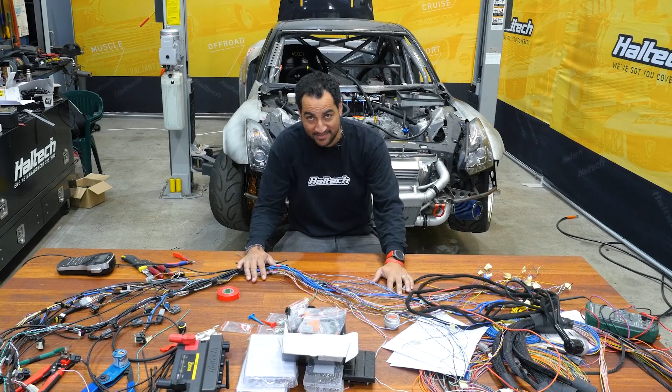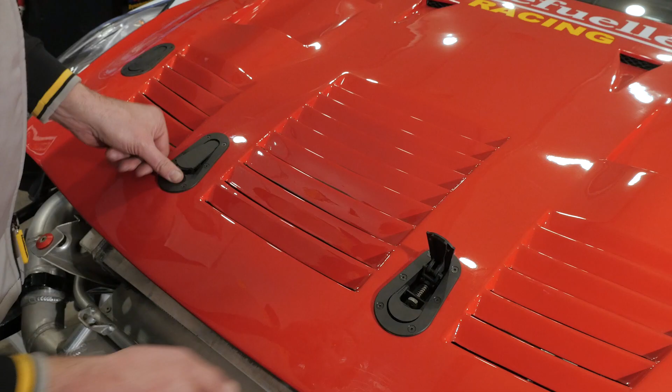So for a quick refresher of what we're dealing with here today, this thing is a Nissan R35 GTR, but does have some differences. Looks pretty similar in here, the Nissan VR38 engine, but as we outlined in the other video series, Brian, the guy that owns this car, has also got an R35 track car in factory form. That's the one with the transaxle, the GR6 gearbox all at the back, the flappy paddles, all that stuff. He wanted this track car to be a little bit different, so he went for a sequential, manually shifted gearbox up the top. It's got an R33 Skyline style rear end, so it's got a conventional differential in the back. He's kind of brought it back to a traditional style race car.

When Davo and I originally did the wire up and the tuning on this car, it was the first time the engine had been fired up after having all this fabrication work done. So we got it on the dyno, we ran it up, and we put a list of things together that needed to be touched up before the thing could go and compete competitively. One of those things was the wastegate springs. This thing has got a factory engine and it's got upgraded turbochargers.

There's a reason for that. Brian's using this engine as the mock-up to get the whole car dialed in, get the tune-up on song, get the suspension sorted, get the flat shift throttle blipping of the sequential gearbox sorted. Then, when that's all under control, he'll drop in his big banger engine. But the factory form VR38 is nothing to laugh at - this thing is making very, very healthy power.

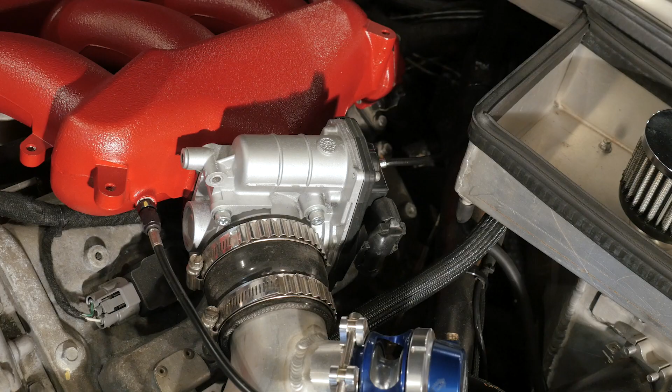So the way I actually managed to bring the power down in the car was by controlling the dual electronic throttle body so that when Brian hit the throttle flat to the floor, those throttle blades were only opening to about 35%. Not an ideal way of doing it, but it's all the tools we had left in the toolbox. It needed to get to the racetrack, and that's the way we got it done.

Since then, it's been back to the workshop. They've fitted some 12-pound wastegate springs in it. So now we can go back through and we can set up some boost by gear and some mapped out boost levels. The way we're going to do that is on our keypad inside the car. We've got a keypad in there that works like a rotary trim. We press that button, boost goes up and up and up until we have a whole bunch of fun.

But before we get into all of that stuff, let's go inside. This thing's had a lot of work done since you would have seen it last, so come in, have a look around. It has been finished off really, really well. This is one of my absolute favorite circuit cars.

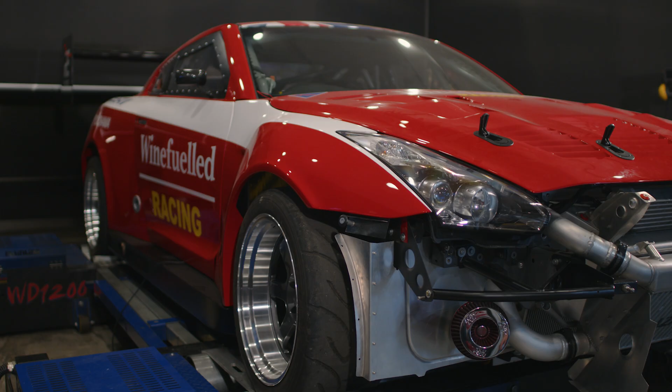Well, inside is just as impressive as the exterior of this car. When you're sitting in the pilot seat, we've got the beautiful Haltech IC7 dash right in front of us, and we've got our reverse camera just to the left here.

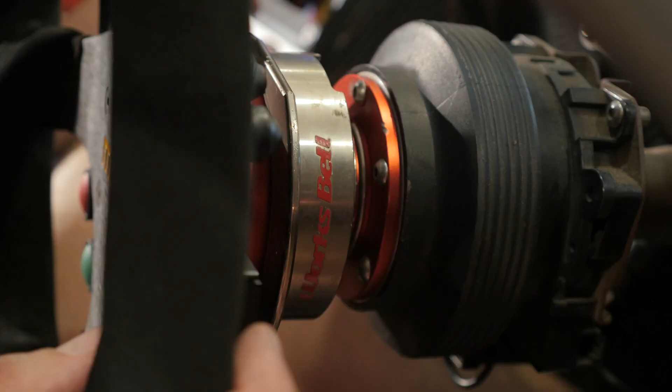We've got the 15-button keypad that's controlling all of the stuff that we need to do while we're driving. It's also got this beautiful steering wheel with buttons on it, with a little transmitter off the bottom here, across to a Bluetooth module, then into the engine management system. It's got the Hollinger flat shift load cell gear knob up the top here.

It's got the Albins sequential gearbox down the bottom. But what's crazy in this car, what's so impressive, is the carbon absolutely everywhere - the carbon dash, carbon center console, carbon doors, the roof's carbon. This is a beautiful race car and it's so well prepared.

So this was the guys at Peruzic Engineering who are responsible for finishing off this car and making it as nice as it is. The guys actually made the pedal box in it themselves. Fantastic engineering job, this car.

When you see it in person, you realize that the roll cage, the seats, every single part in it is really well thought out so that it's easy to work on. And like all of these things, the more work that's been put into it, the simpler it looks. That's the case in this car - you get in and think, oh yeah, it's functional, that makes sense. It's just simple and it just works.

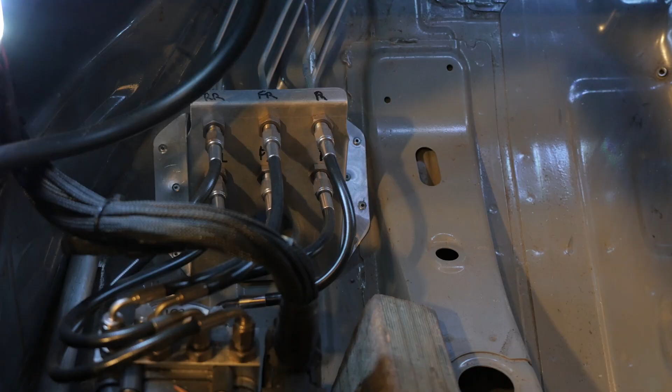This is also the car we used to do the Bosch Motorsport ABS CAN integration. That means the Bosch ABS system in this car communicates back and forward with the Haltech ECU, sharing the G-sensor data, sharing all of the wheel slip percentages, individual wheel speeds, and how the traction control system is functioning.

So it gives us what level the ABS is working at, how aggressive it's working if we've had a slip event. All of that data goes into the Nexus ECU so that we can data log it and give the driver feedback when they come back to the pits.

Well, that's enough about the car. It's here today to do the power management stuff. So what Brian's after is we've got a button on the dash here, on the keypad - boost - with position 0, position 1, position 2, position 3. What he wants to do is have a different power level each time I press this button.

So like we said before, factory these engines made about 300 kilowatts at all 4 wheels. So he's looking for about 300 kilowatts on wastegate pressure, then we'll bump it up by about 30 kilowatts every time we press the button.

And we're going to do that because Brian wants to shake the car down when he's at the racetrack. He wants to be able to let some of his friends drive it, hopefully me, and he also wants to have different settings for wet weather conditions - if it's really cold, if it's wet, if there's a bit of sleet - so that he can have different power management as well as different traction control strategies and different ABS profiles.

One thing I am a little bit nervous about is that the guys have fitted some 12-pound wastegate springs to this thing, and Brian's asked for a wastegate power of about 300-ish kilowatts, something like that. It's got big turbochargers on it, a 3.8 litre engine. I'm nervous that even on wastegate pressure this is going to make more power than the lowest power we want, so I'm glad the thing's got electronic throttle bodies on it.

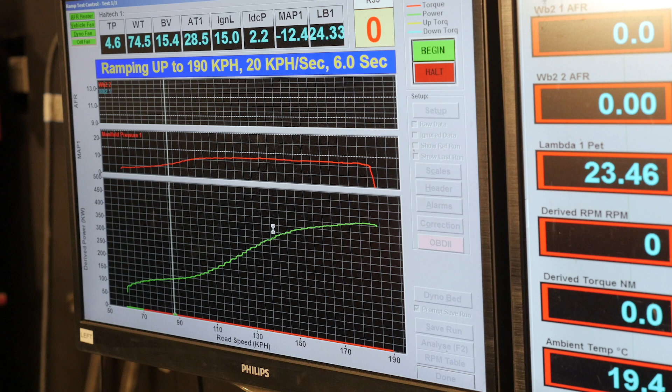Well, it's not every day that you make 400 kilowatts, or 545 horsepower, at the wheels and you're somewhat disappointed. And I say that because I actually want the wastegate pressure to make a lower horsepower than that. So on wastegate pressure, with 12-pound wastegate springs, this thing is making 406 kilowatts at the rear wheels.

Before we go any further, we probably should start at the very beginning here. I keep talking about a wastegate and a wastegate spring, but we need to understand what that is before we can start talking about boost control.

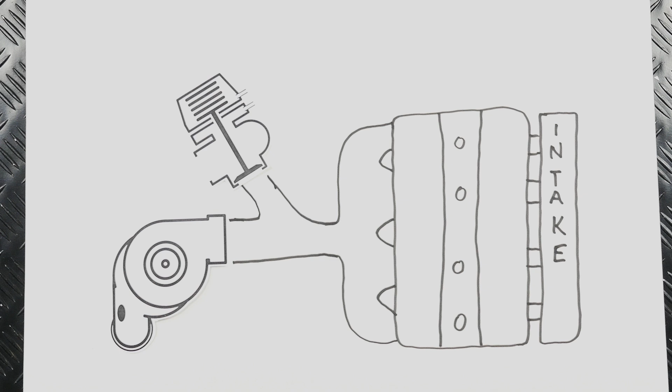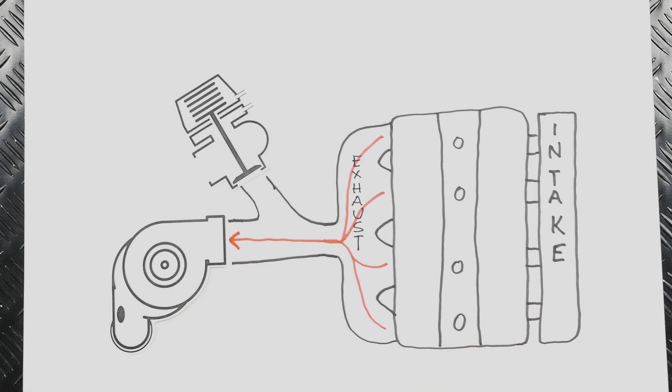To start at the beginning, remember your turbocharger is connected to your engine's exhaust system. The exhaust comes out of the engine through the turbocharger's exhaust housing, through the turbine wheel, then out into the exhaust. If we put as much exhaust that comes out of the engine straight through that turbine wheel and out the exhaust, we're going to make as much boost as that turbocharger will possibly make.

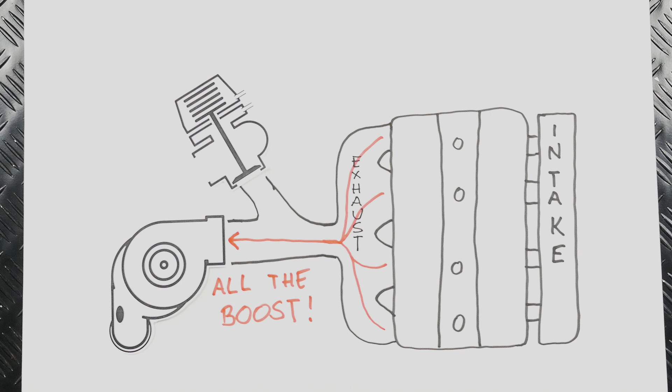And that's fun, but it's not what we really want in every application. We really want to have a way of directing how much exhaust goes through that turbine wheel and how much gets dumped straight down into the exhaust system, or through a screamer pipe straight onto the ground under the engine. And that is where the wastegate comes in.

The wastegate's job is to direct those exhaust gases either through the exhaust turbine wheel or straight out the exhaust, bypassing the turbocharger altogether. Why would you want to do this? Well, to regulate the turbine speed, thus regulating the boost pressure.

So in this car, we've got 12-pound wastegate springs. That means when our manifold pressure reaches 12 pounds, our wastegates are going to start to open, and they're going to regulate that pressure so that we get 12 pounds of manifold boost pressure. That's a fixed boost pressure.

There's a few different styles of wastegates. There's an internal flapper style pneumatic wastegate, which has got the flapper built into the exhaust housing of your turbocharger. That could also be electronically operated. Then we've got external wastegates - electronic external wastegates and pneumatically controlled external wastegates. This particular car has got a pneumatically controlled external wastegate, and that's the one we're going to be talking about.

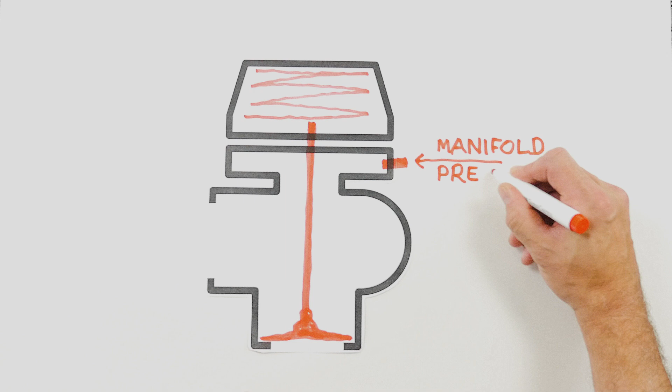The wastegate has a valve built into it with a spring, then it has a pressure source from the engine's inlet manifold on the top, so a reference pressure source. Basically how this works: let's say we put a 12-pound spring in it, which is what this has got. We've got a manifold reference on the wastegate, then as the engine starts building boost pressure, that manifold pressure overcomes the spring pressure in the wastegate, the valve lifts, in turn allowing exhaust to bypass the turbine and head straight out the exhaust as wasted gas.

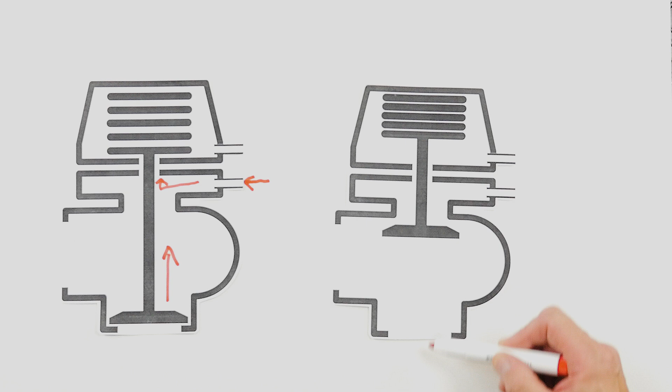By doing this, the turbine slows down, our boost pressure slows down, then that valve will end up opening and shutting, regulating that manifold pressure to the wastegate spring pressure. That's exactly what just happened here.

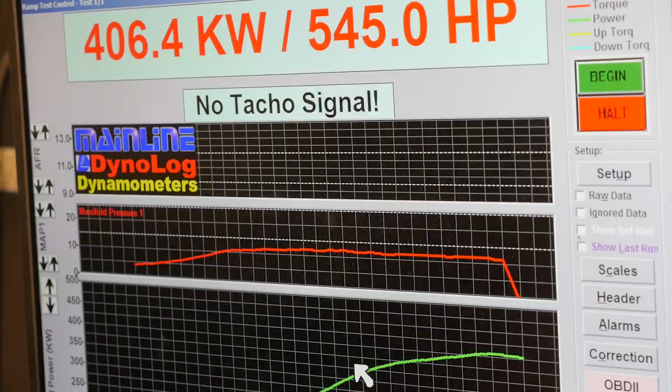Now this car has actually turned out to be an excellent test car because it's got electronic throttles on it as well. Normally I wouldn't be able to lower the full throttle power of this car under that wastegate pressure, but because this has got electronic throttles, I can now show you two things at once.

We can limit the engine power based on the throttle angle. Then to make more power than that, we can bleed manifold pressure reference off the wastegates in order for that valve to lift a little bit later on, to make more boost pressure. Now, knowing that this thing makes 12 pounds on the wastegate springs, there's no way that I can make those wastegates open any earlier. So the only tool I've got in the toolbox is to physically open the throttle blades less as the driver hits it flat to the floor.

So when you press the throttle flat to the floor, normally the throttles on the engine would go to 100%. But what I'm going to do here to limit the power is make it so that when I press my foot flat to the floor, the throttle blades on the engine only open up to about 35% throttle. I'll do a power run, see how much power it's got at the wheels, and see whether that's going to be acceptable to put onto our trim switch here to limit the power so Brian can have several different power levels at the wheels.

This is traditionally not how you're supposed to do this job. You would typically install, say, a 4 or a 6 pound wastegate spring into both the wastegates on the engine. In this case, the wastegates are in a crazy place to get to - very, very complicated to pull those springs out. And if we do put a 6 pound wastegate spring in them in the first place, that means we'll only be able to go, depending on how we plumb those wastegates, the most simple method typically allows you to double the boost of the wastegate spring.

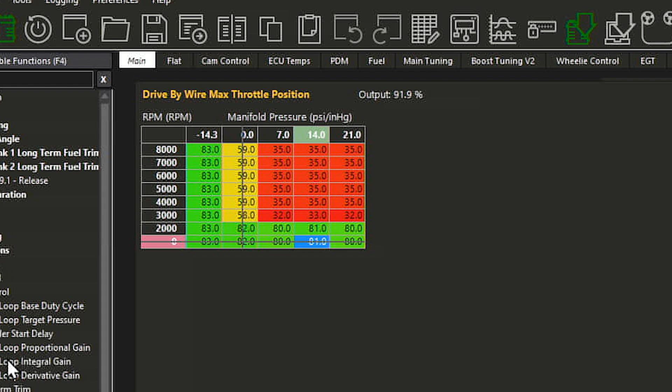So when I put that on level 0, which means no lights on at all, our maximum throttle angle under boost is going to be 35%. Then, if I put it on number 1, I'll open the throttle a little bit more. If I put it on throttle number 2, I'll open it to, say, 100% throttle and get out 400 kilowatts.

Then, if I put it on position number 3, the top one up here, that might then use our closed loop boost control, which will increase the target boost pressure up to whatever it needs to make, say, around 440 kilowatts, which is kind of the top power level we're aiming for, and the throttle would be wide open. So this is probably a really good example of using the keypads or using inputs of the ECU to influence multiple maps within the engine management system.

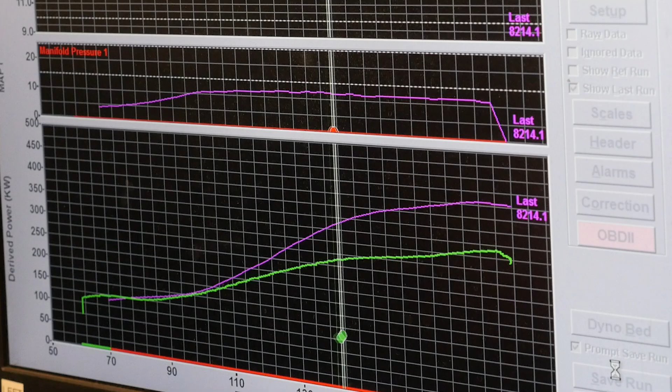So we're making a little bit of progress here. That pull just then, I've got it on the data log here. If I drag across there, you'll be able to see that on the other page.

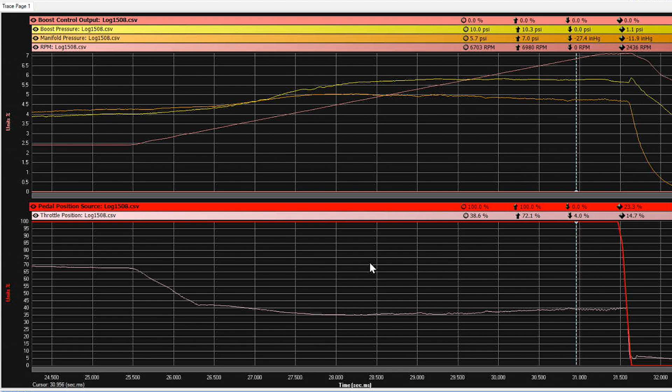So my pedal position was at 100% along that whole pull, but my throttle body position was only at 36, 37, 38, 39%. I've had to map that back in order to achieve that power of 313 kilowatts or 420 horsepower.

Up the top here, manifold pressure versus boost pressure. So my manifold pressure, in order to achieve that power, which is bloody good power for 6 pounds of manifold pressure - this engine also has boost pressure sensors. A boost pressure sensor is mounted between the turbocharger and the throttle blade. A manifold pressure sensor is mounted between the throttle blade and the intake valve. So what this is showing us is that I've got 6 pounds of intake manifold pressure, but I've got 10 pounds of boost pressure.

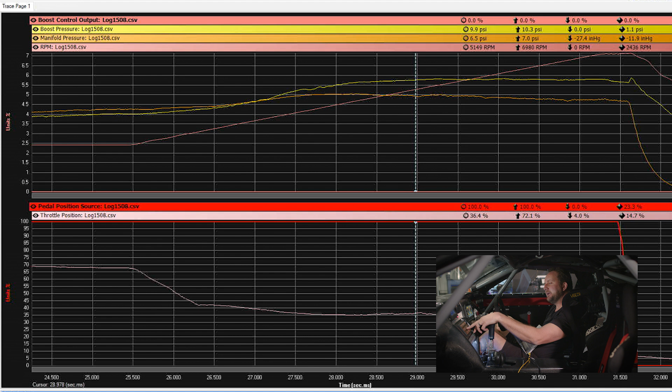That throttle body is limiting the pressure that's coming into the engine. So you can see that we really are restricting the engine by running it at a 35-ish% throttle blade opening, but you got to do what you got to do. Next up, I'm going to try and add another 30 or 40 kilowatts to be able to get into position number 1 on the boost, or power level, switch.

And again, we've had a little bit more success. We've picked up about 30 kilowatts at the wheels, one press of the button. That's exactly what I was after. All I've done is increase it so that at full throttle, we've now got 45% throttle opening instead of 35% throttle opening. That's given us that extra power.

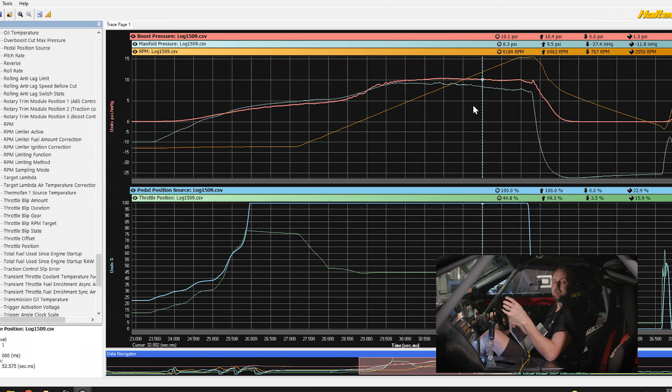If we look at the line across the top here, we can see that we've now got 10 pounds of boost pressure, that's the pressure in the intake pipe, and we've got about 8 pounds of inlet manifold pressure. Remembering that on the last run and this run, we've still got 0% duty cycle on that solenoid that's on the wastegate.

And I probably need to start going into that now.

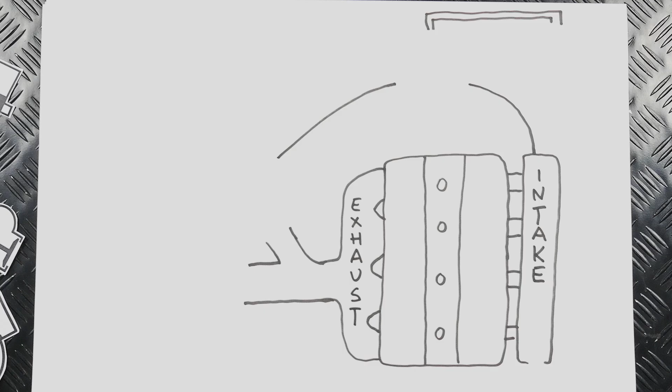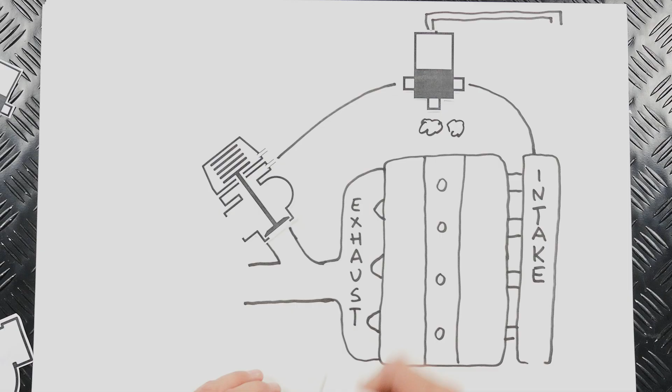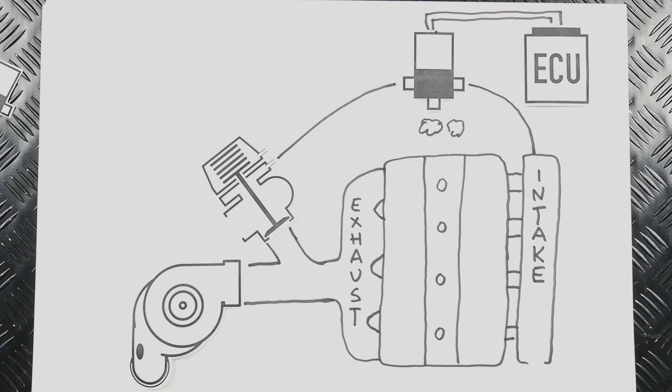So when I say 0% duty cycle, we've got a pneumatic solenoid, a 3-port boost control solenoid that's connected between the manifold pressure reference and our wastegate. It's that valve's job to determine whether the manifold pressure makes it to the wastegate or whether it gets bypassed back into the intake just after the air filter. The reason why we do it like this is so our engine management system can send a pulse out to that solenoid and determine how much air to bleed off that wastegate. If we bleed off 100% of the manifold reference, that means we're going to make as much boost as we possibly can until the pressure in the exhaust system overcomes the wastegate spring and the valve starts to open. That's what we spoke about before - we've only been able to bleed off so much gas before that wastegate eventually opens and bypasses that wastegate spring.

The reason we're talking about this is because so far we've run this thing at our wastegate pressure. We've run it with very closed throttle angle, with a little bit more throttle angle. Now we're finally up to the closed loop boost control strategy that we can actually start talking about the thing we're supposed to be talking about. Remember the first run we did, that was 100% throttle opening, and that was our wastegate pressure of 12 PSI - we made 400 or 410 odd kilowatts. I already know that's the power level it was going to make on that wastegate pressure, and that's the pressure I'm going to put in for our switch position number 2 here.

So all we need to do now is use our closed loop boost control strategy and map out position number 3, the big banger. So for position number 3, I'm going to go into our maps here and ensure I've got 100% throttle opening. I typically put these at 98% - personal preference, I like to do it like that because I don't want the motor driving 100% wide open. Some electronic throttle blades actually go over center, so they'll start shutting, where you might find that 96 or 98% is true wide open. It's such a small thing to do, I don't really think it matters either way, but I think it's just good practice.

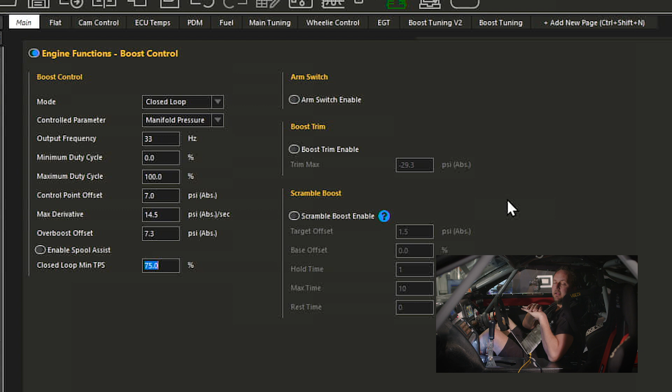And the first setting, closed loop or open loop boost control. Open loop boost control basically means that we're putting in a bleed style duty cycle on a 3D table. The tuner puts that number in - they might say bleed off 50% across every RPM point and every manifold pressure, and that's the end of that. It's set and forget, there is no external influence on that. The engine management system is not doing any boost targeting, nothing like that. It's an open loop, a basic or simple form of boost control. Think of it like an electronic bleed tap - open the tap halfway, that's all there is to it.

Closed loop means that, yes, we still have that table - so we still have, let's say, that 50% bleed table - but we also have a target pressure sitting behind that. So the tuner types in, yep, I'll bleed off 50%, that's going to get me to 14 pounds, my target pressure, done. Then we set a target pressure of 14 PSI. If the engine management system sees that the manifold pressure is not at 14 PSI, it goes into what we call our closed loop state. It will then adjust that 50% duty cycle up and down all by itself in order to achieve that target for you. So this is something beautiful about the engine management system being smart - it can see the target and it does whatever it takes to attain that boost target for us. That's what closed loop is.

Closed loop idle control - we type in that we want 1,000 RPM to idle. If it's idling a little bit too low or a little bit too high, that closed loop strategy kicks in and allows us to meet our targets. Our closed loop O2 control - air fuel ratio, we want to target a particular air fuel ratio. If we can't meet that ratio, the closed loop O2 strategy will come in and meet that target. So closed loop refers to something where the engine management system has a target and the engine management system is doing whatever it can to achieve that target.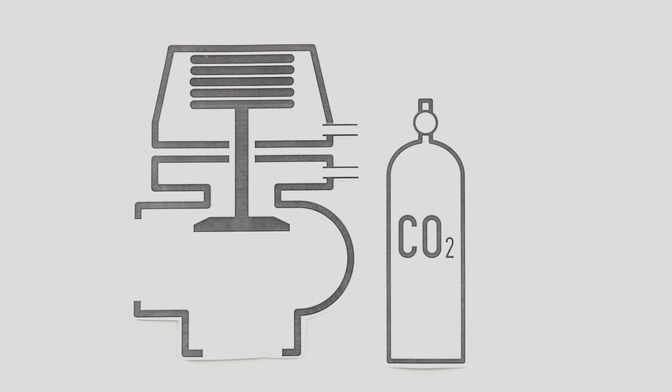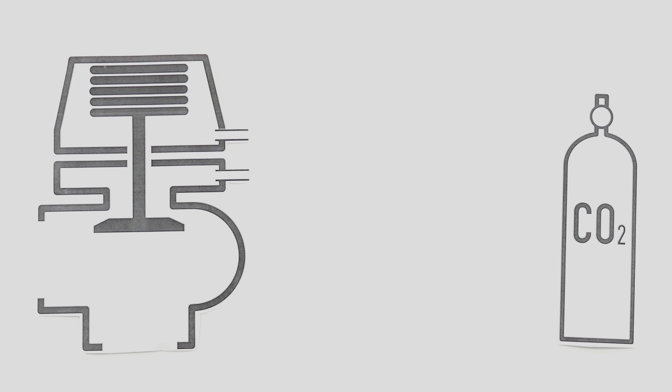Or you might want to do your wastegate hat pressure. Don't let this confuse you - that's typically used when doing drag racing with CO2 boost control strategies, a little different there. Instead of using our engine manifold pressure as the reference, we have a compressed bottle of CO2 in the car, maybe 80 or 100 PSI. We use that pressure as our reference for the wastegate, then use our closed loop strategy to choose how much CO2 to apply to that wastegate. We'll do a video about that - it's a completely different animal. We're not going to go into that on this car because we don't have any of that system set up. That's more of a drag racing thing.

Our output frequency, 33 Hertz. We're using the Haltech boost control solenoid, a traditional Mac valve, 33 Hertz. That means this thing can operate 33 times a second.

Our minimum and maximum duty cycle - how the minimum that our solenoid can physically pulse. We might limit it at 0 and 100%. Sometimes you might want to let your solenoid pulse at, say, 20% duty cycle to 80% duty, narrowing that range to get really tight control. For the majority of cases, 0 to 100% is fine.

Our control point offset - let's use this car as an example. Say I want to target 14 pounds. If we set our control point offset at, say, 7 pounds, that means the engine is going to come on boost, come up to 7 pounds of boost pressure, which is within 7 pounds of our 14-pound target. So control point offset means we need to be within this amount of our target until the closed loop strategy will start to work.

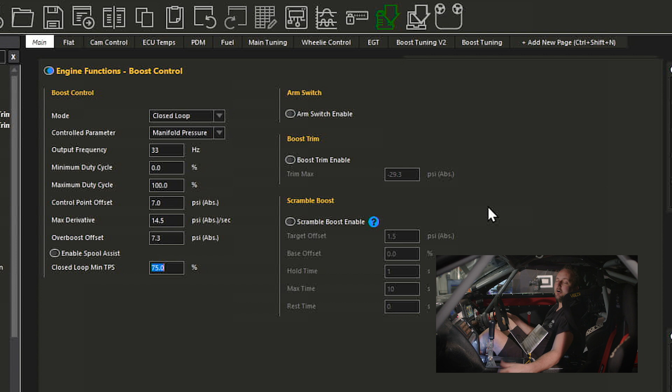Scramble boost is typically a circuit racing thing. You press the button, it says, alright, you add 3 pounds of boost pressure, and you can hold that button down for 5 seconds, or 10 seconds, or as long as you like. So basically what the scramble boost button is doing is allowing you to have an over boost condition for a certain amount of time. Some racing categories allow you to do this, or on the street, you might know that your engine can cop an extra 10 pounds, but only for a few seconds, so be careful with the scramble boost button.

Now that we've had a look at the settings for the boost control strategy, we get down to the mapping part of it.

The first one here, closed loop base duty cycle. I'm going to talk about this at, say, 12 pounds. First of all, we know this car's wastegate pressure is 12 pounds—if we have no boost control intervention, it runs 12 pounds of boost pressure. So if I have a look along this table here, at 2,000, 3,000, at all the RPM points, 0% duty cycle, no bleed whatsoever on that wastegate solenoid, gives us 12 pounds of boost pressure.

If I come across here to 14 pounds, I'm going to have a guess at this, and we're going to run this up in a second and see the closed loop strategy working. But I'm going to guess at 12% bleed. So what that means is our solenoid will be pulsing and bleeding off 12% of the air available to it, and that it's going to make 14 pounds of boost pressure.

Typically, as we rev the engine, we're going to bleed a little bit more off in order to maintain a flat boost curve. If we were trying to target 16 pounds of boost pressure, we might want to bleed off, say, 17 to 19% duty cycle. At 18 pounds, we'd need to bleed off a little bit more. If we were trying to target, say, 30 or 35 pounds, we might need to bleed off 100% to get the most boost we can possibly get out of this wastegate plumbing system.

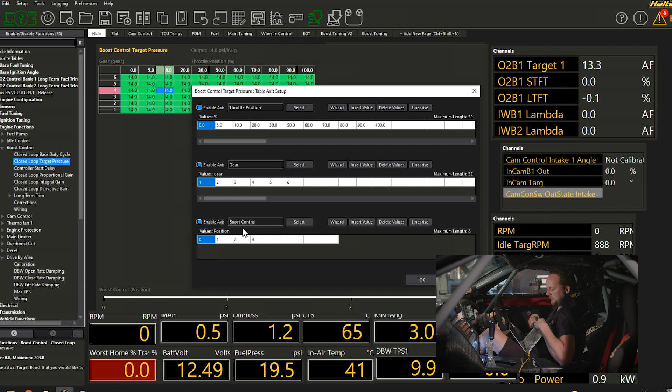Next, our target pressure—that's going to be a little bit different on this one. So I'm going to go up here down the bottom. We've got the 4th dimension of our axes along the bottom of the table. So if I just press F3, I can see that this table is throttle position versus gear versus our boost control, so that's versus our boost or power button that's on the dash here.

If I go to level 3, I'm going to be trying to target 14 PSI across every throttle position and in every gear. Now, circuit cars tend to like having a different boost pressure in each gear, as well as a different boost pressure depending on the throttle position.

So at part throttle going mid-corner, sometimes they don't want full power, and they'll find the car's a little bit jerky or surgy. So they might want 8 or 10 pounds of boost pressure at part throttle, then at full throttle they'll want 14 pounds. On a street car, typically everyone wants the most amount of boost pressure possible all the time.

Our controller start delay. Once we've hit the throttle and come into boost, our controller is going to start working. It's going to go to our base duty cycle values and stay there, let's say for 2.5 seconds, in open loop, looking at our base duty cycle. Then it'll be allowed to go into the closed loop strategy. This is to help the boost stabilize before the closed loop controller can start working.

The next 3 are our proportional, integral, and derivative gains. These are magic values - they're really not. Proportional, integral, and derivative, or PID controlling, is how any sort of closed loop strategy works. What it's looking at, the proportional gain...

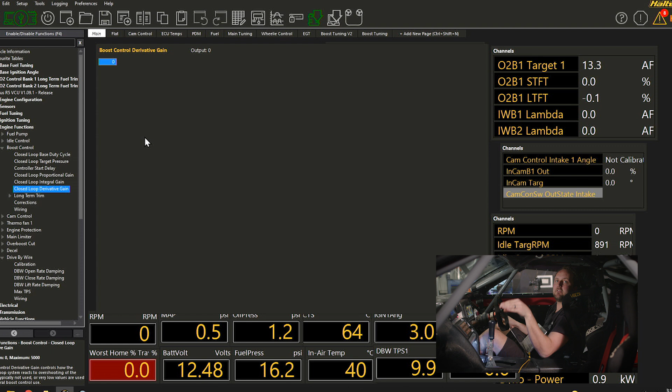Now, this is a really short demonstration or description of what these values are. We could go into PID controlling forever. If you're interested, jump on the internet and have a look - there's a huge amount of documentation about how PID controllers work. I'd really recommend looking at that before going into any closed loop control strategies across any engine management system, or really anything in life.

We've talked about our base duty cycle that was going to be, let's say, 12% or 13% in order to achieve our target pressure of 14 psi. Now, that was just a guess. Our short-term trims are going to adjust that for me.

They're going to be going plus or minus, making up for any of my mistakes. But you don't want them making up for your mistakes every single time it comes on boost - it'd be much better to learn from your mistake, right? That's what the long-term trims do.

If we pop these open, the long-term trim gain - this is how much the system is going to learn. A typical value of 2 or 300 is about right. I want it to learn more the further away from the target it is. If I'm really close to my target pressure, I don't want it to learn very much. If it's a long way away, I want it to learn aggressively so that next time it comes on boost, it's a lot more accurate.

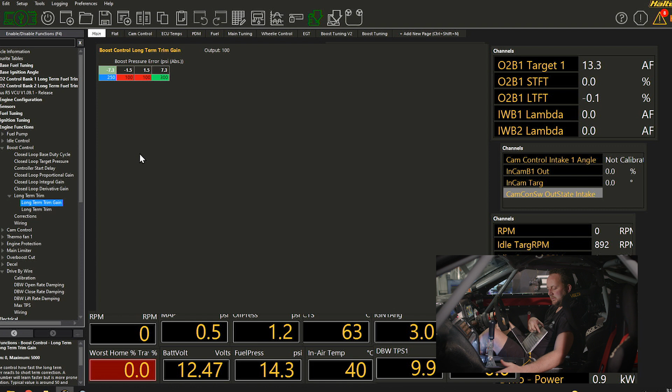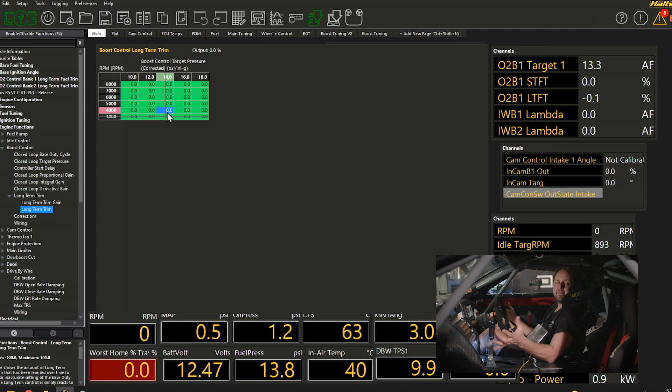If I come down to the long-term trim table itself, it's got the same table axes as our closed loop base duty cycle table. As we drive the car, it's going to come on boost and come up to our 14 pounds. It might need a few percent duty cycle, more or less, to get there than what I've set up, depending on the day, temperature, track conditions, intake temperatures, turbocharger temperatures, oil temperature - all these things you simply can't tune for in the day you're on the dyno with a particular car. That's why these strategies are so important, because now the engine management system is going to see how far from the target it was.

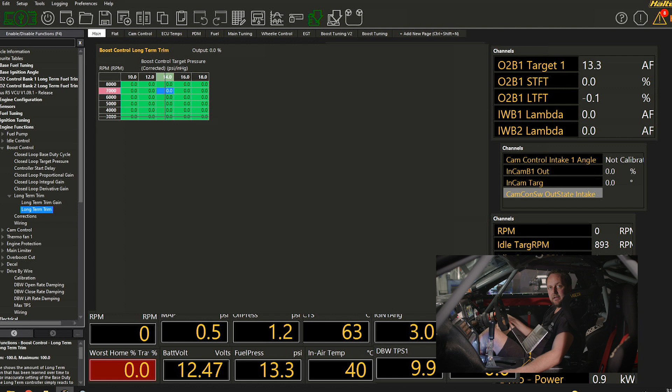So see how much error there was in that base duty cycle. It looks at the short-term trim and says, oh, it's doing a lot of work. It'll start filling out this table in the background in order to get us closer to our target every single time the thing comes on boost.

After setting up our start duty cycle and our target boost pressures, most of the things configured here are straight out of the base settings in the Nexus series or Elite series ECU. They're a really good starting point, so I'd suggest all you need to do is set base duty cycle and target pressure. I'm going to give the car a run and log, most importantly, the boost control output, so I can see what duty cycle the solenoid was running at and what manifold pressure the car had, then see if I need to make any changes.

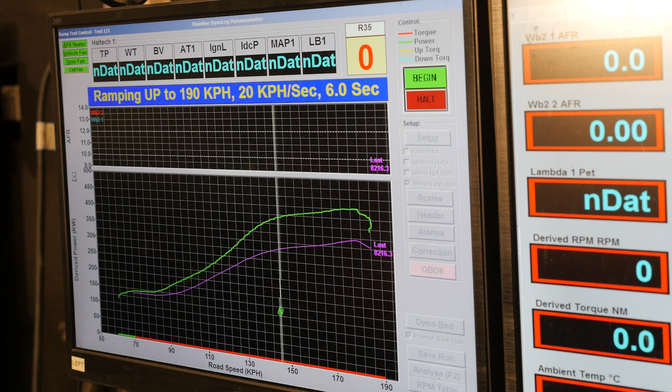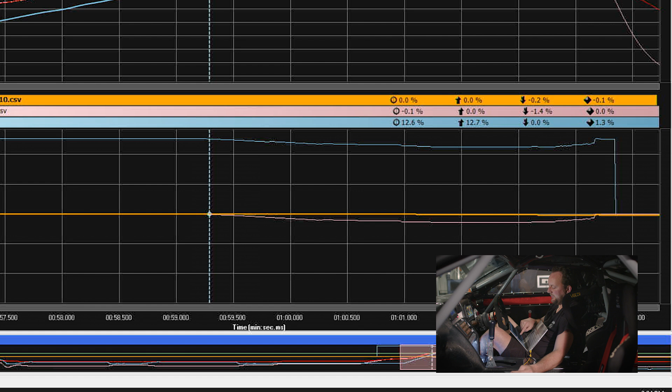That run shows we've picked up a little bit of power over our base wastegate pressure, so I was excited to see that. Coming down to our data log, we were targeting 14 pounds of boost pressure. Looking at the boost control output, the blue line, I guessed our start duty cycle, or the duty cycle we'd need to bleed off to pick up that boost pressure, was going to be about 12 or 13%. That's resulted in a manifold pressure of 14.5 psi, so it's gone half a pound over what I was expecting.

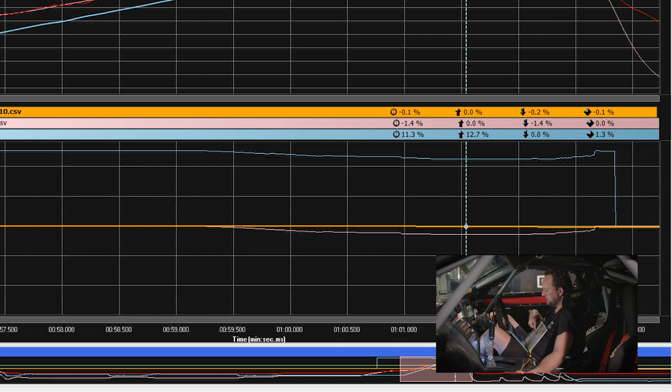Then look at this. As the run starts cruising across, our short-term trim pulls out 1% of the duty cycle, correcting for my error. As we keep going, it's pulling out 1.2, 1.3, 1.4%. Then look at the yellow line there - the long-term trim has identified that the short-term has been pulling out 1% for long enough, so it steps in and pulls negative 0.1%. These are small values, but remember we're only trimming a small amount to try and pick up 2 pounds of boost pressure. By the end of the run, the long-term trim has pulled out negative 0.2%, and our short-term trim is pulling negative 1.3%, ending with an error, or a target pressure, of 13.8, 13.9 pounds when we're targeting 14.

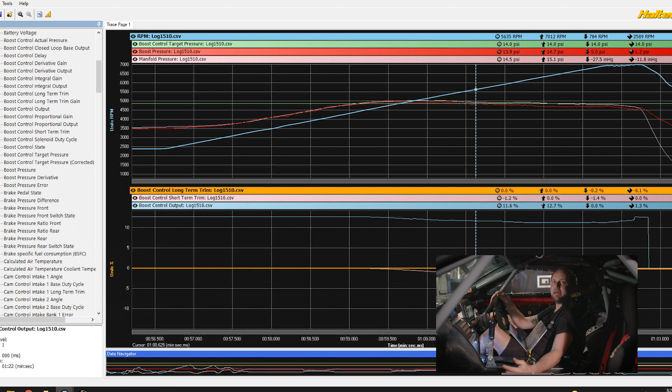We've got to be a bit realistic as well - think of that pneumatic system we're trying to control. We've got our turbochargers compressing the air, putting it through the intercooler, into the engine. We've then got our combustion, which is driving our turbochargers. Then we've got our wastegates flapping up and down to maintain that target pressure. We're simply not expecting this to be accurate to 0.1 of a PSI - there's always going to be a little bit of fluctuation. I'm really happy with that, within 0.2 PSI.

I'm now going to go through and touch up the tune on this thing a little bit, tidy up some of the little bits and pieces while it's on the dyno, because I'm a bit of a perfectionist. I can't handle it when our O2 trims are more than sort of 5 or 6% out. So I'm going to go through and do a little bit of that work.

I'm so pleased that we could go through a little bit of the closed loop boost control strategy on this car. Hopefully now you've got a better idea of how the closed loop boost control strategy works, how the software works, and how it allows you to assign several functions to one particular button. That's so handy when you're trying to build a power management strategy on a car like this. I know it's been another long one, another technical one, with heaps of laptop screens, but I really hope you've learned something and it's given you a bit more confidence to start tinkering with your engine management system.